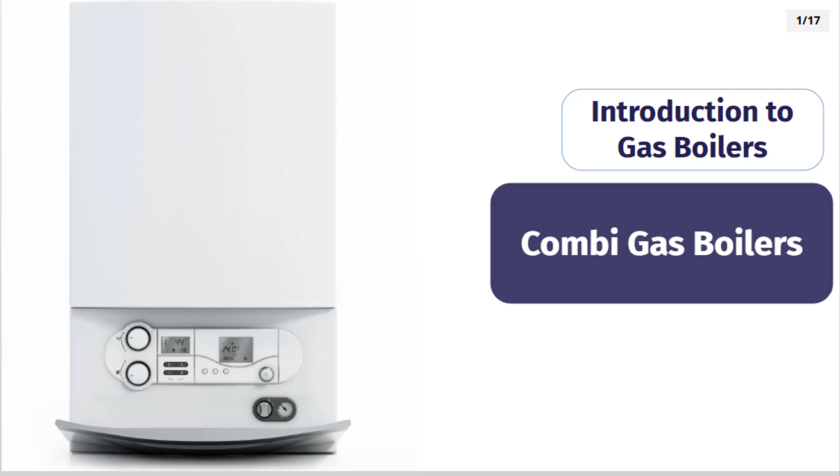By the end of this module, you should be able to define combi gas boilers, identify the main components of a combi gas boiler, and identify the defining characteristics of a combi gas boiler.

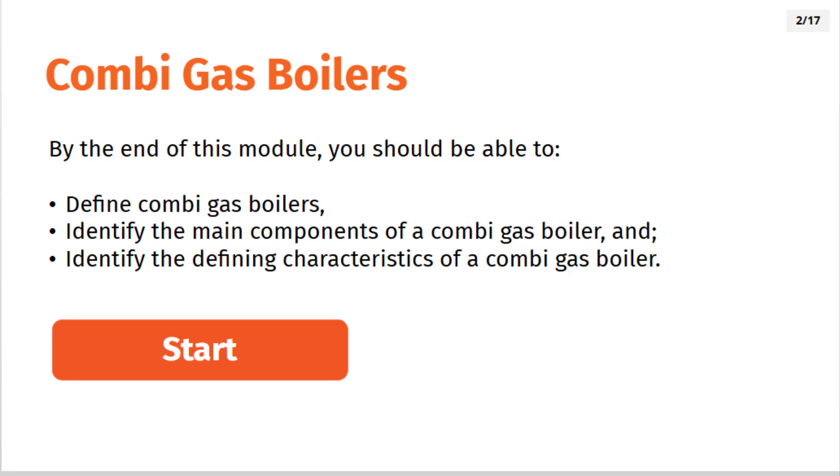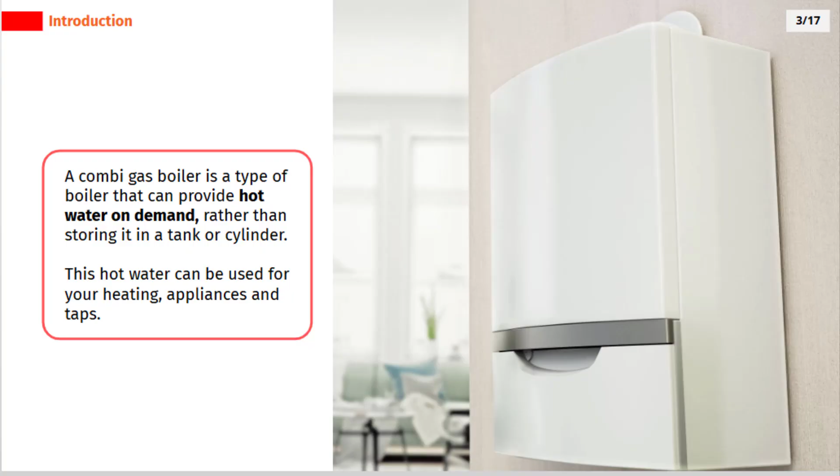A combi gas boiler is a type of boiler that can provide hot water on demand, rather than storing it in a tank or cylinder. This hot water can be used for your heating, appliances and taps. It is called a combi gas boiler because it is a single unit that serves two combined functions: heating and hot water.

To help deliver hot water even more quickly, modern combi gas boilers also have a built-in preheat system. This explains why you can have a hot shower almost instantaneously. This is a small reservoir of water that is always kept at a certain temperature and means that you will instantly have hot water when you turn on a tap.

It is difficult to physically differentiate the combi gas boiler from the other types of gas boilers. One easy way to do it is to open the unit up. A combi gas boiler pump is located inside the boiler instead of outside. A combi also has two heat exchangers as mentioned in the previous topic.

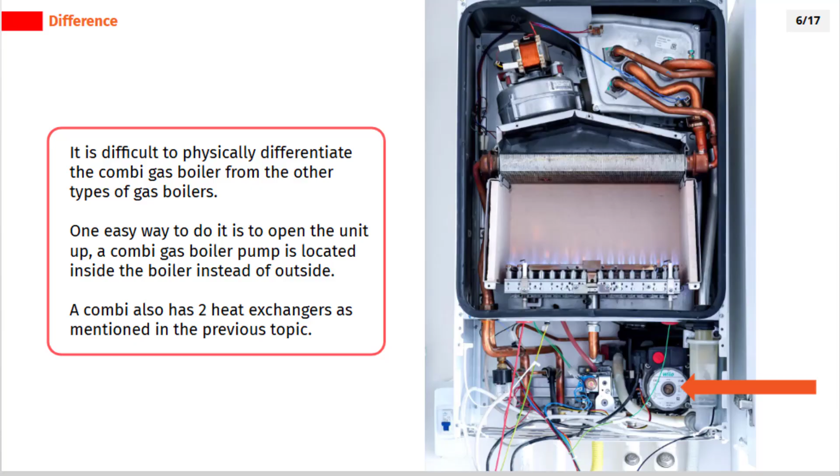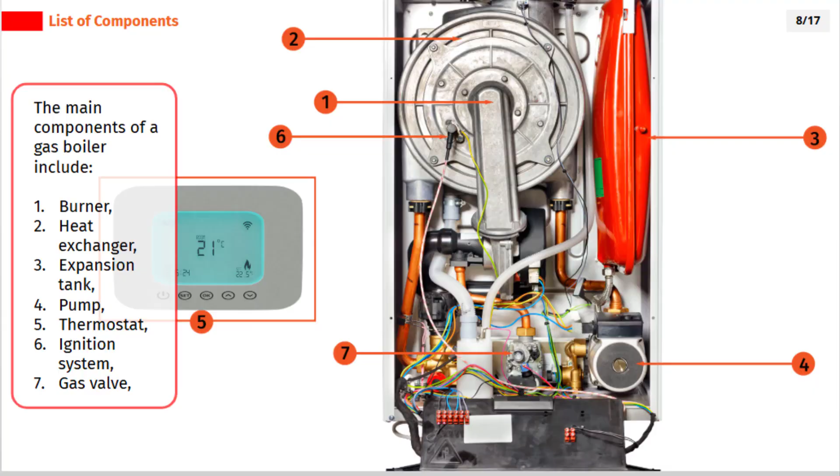The main components of a gas boiler include burner, heat exchanger, expansion tank, pump, thermostat, ignition system, gas valve, flue, supply lines, fan, and sensors.

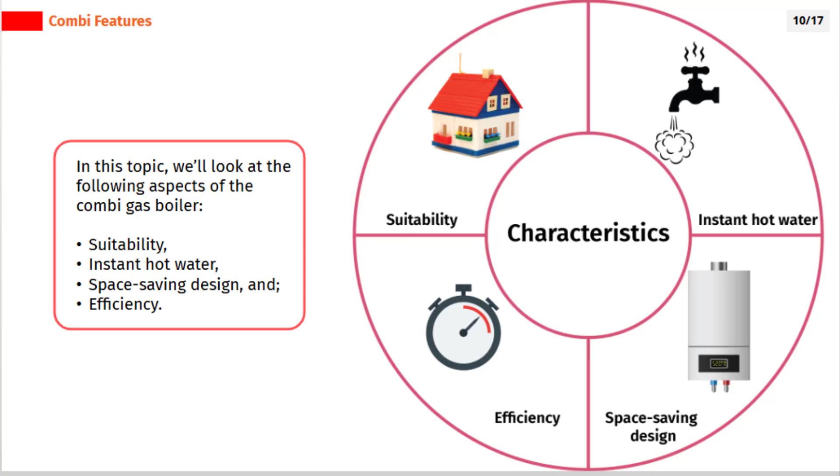In this topic, we'll look at the following aspects of the combi gas boiler: suitability, instant hot water, space-saving design, and efficiency. Combi gas boilers are ideal for smaller households where space may be an important consideration. This is because combi gas boilers may not be able to meet the hot water demands of large homes with multiple bathrooms.

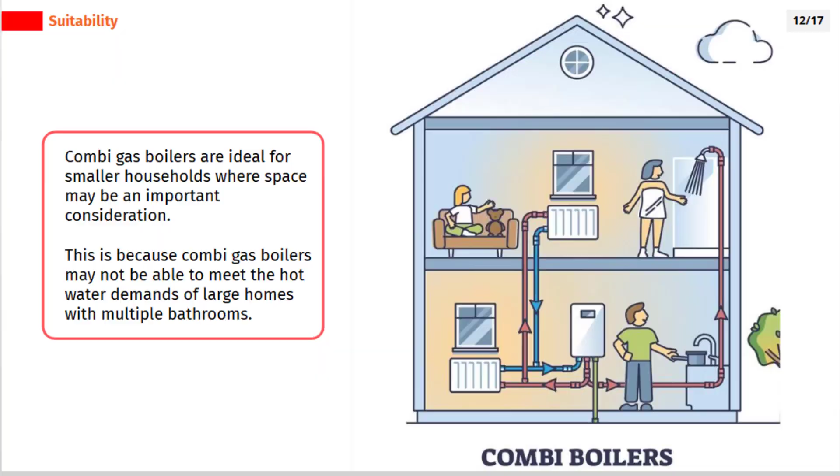Combi gas boilers heat water directly from the mains, so there is no need for a separate hot water tank. This means that hot water is available on demand, making it an ideal choice for those who require instant hot water.

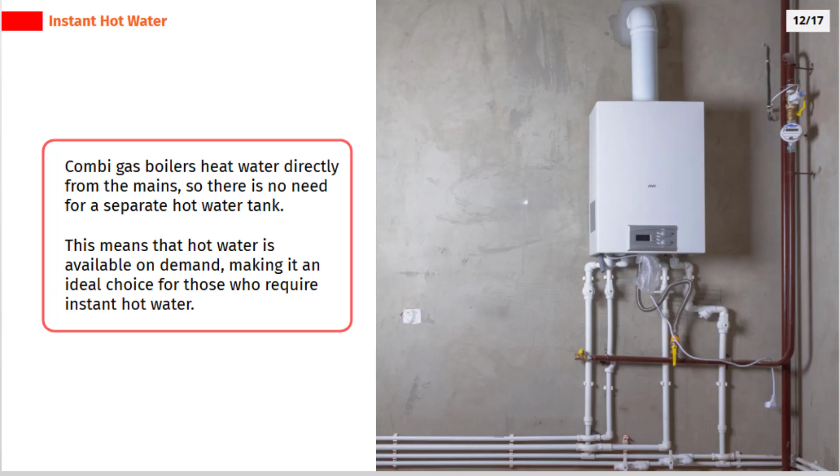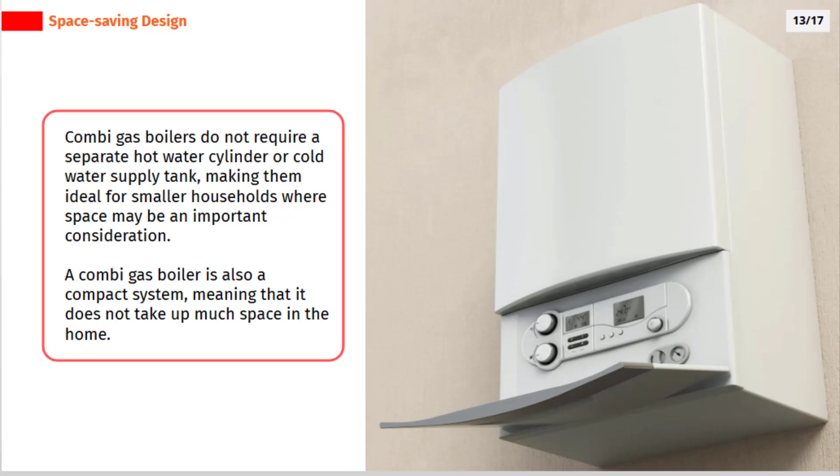Combi gas boilers have an impressive efficiency rating of 90 to 94%, outperforming conventional boilers and older heating systems. This rating is higher than that of conventional boilers and older heating systems, which can devote around 55% of their energy to central heating.

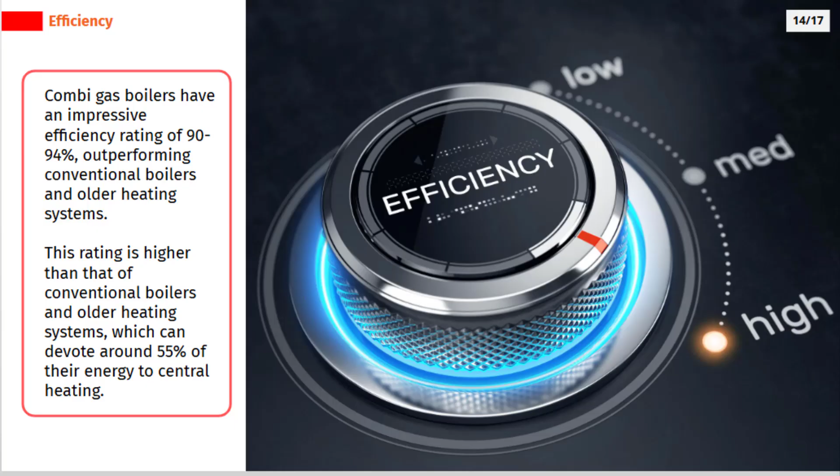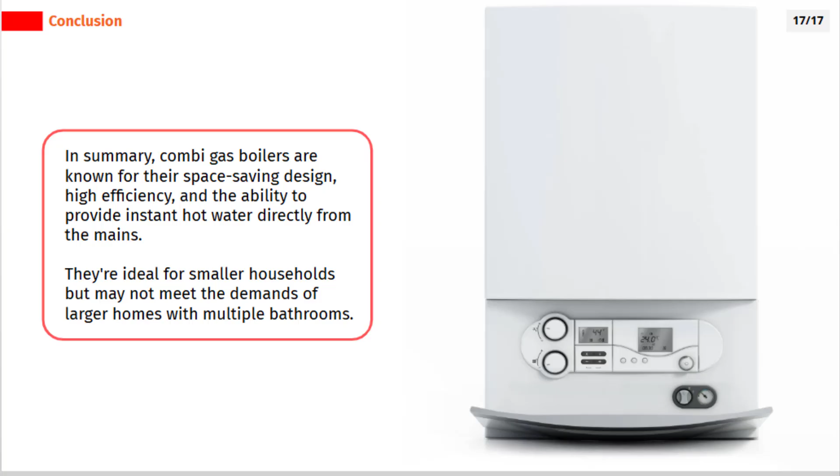In summary, combi gas boilers are known for their space-saving design, high efficiency, and the ability to provide instant hot water directly from the mains. They're ideal for smaller households but may not meet the demands of larger homes with multiple bathrooms.